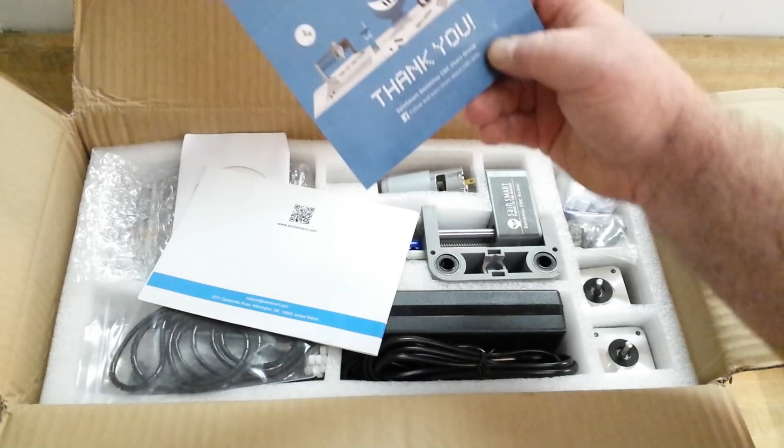Let's get it open and see what's up. This is the Genmitsu 3018 Pro CNC router, engraver, milling machine. You can even get a laser for it. Now, we're not going to be making any parts out of hardened steel or titanium or Inconel, but we can do some nice work on plastic, wood, acrylic, aluminum, and brass. So I am going to unpack this, get it all laid out here nice and neat like, and then we'll come back. Alright? Alright.

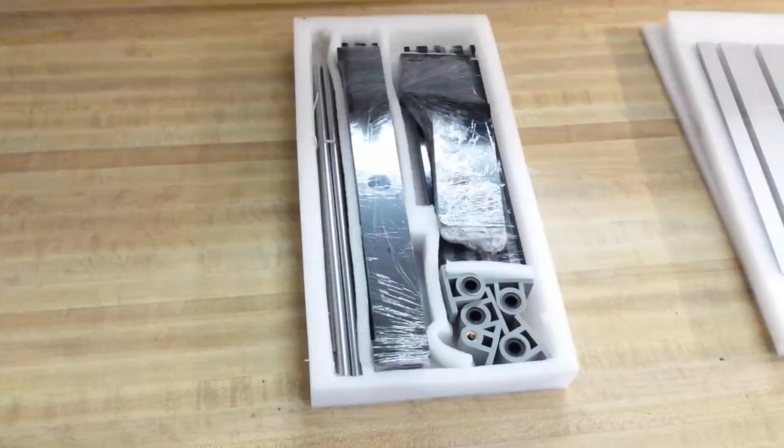Okay, so there are 3 layers in that big box. This is the bottom layer, and inside we have our linear bearing rods and Acme threaded lead screws. How about that? That's a huge improvement over the 3D printer that I built a couple years ago. This has actual Acme threads.

We've got some plastic pieces here. These are frame pieces, obviously. More plastic frame pieces. This aluminum X extrusion type stuff. And we have linear bearings, which I thought on initial examination were 3D printed, but I see ejector marks, so they've been injection molded. So far, I'm pretty impressed.

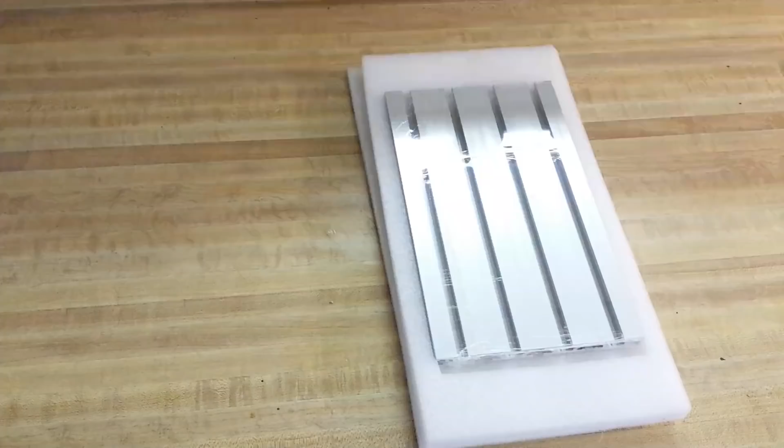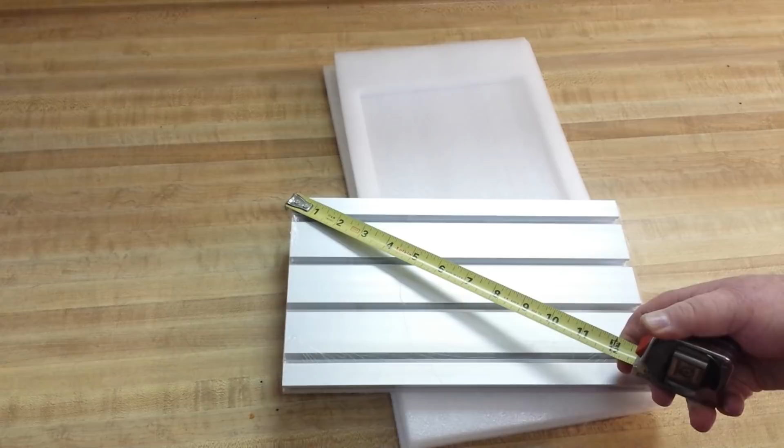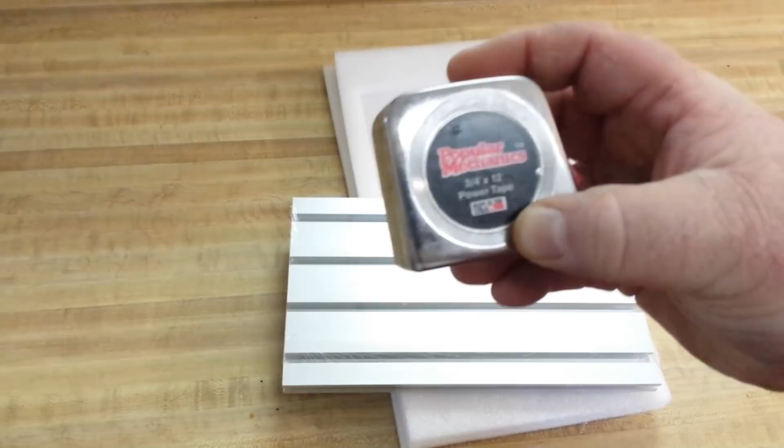The middle layer in the packaging consists of this extruded aluminum workbed. That's actually kind of heavy. We're looking at 1 foot by about 7 1/4. Yes, this is the Popular Mechanics, American made. No metric on there. I'm just teasing you guys. I use metric all the time, but sometimes it's fun to tease you a little.

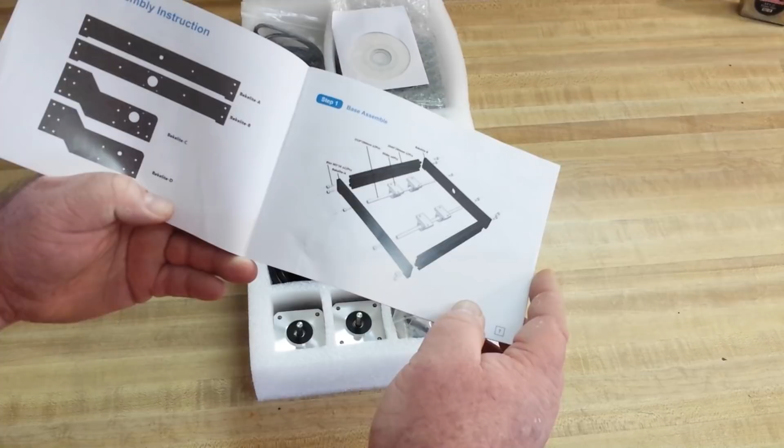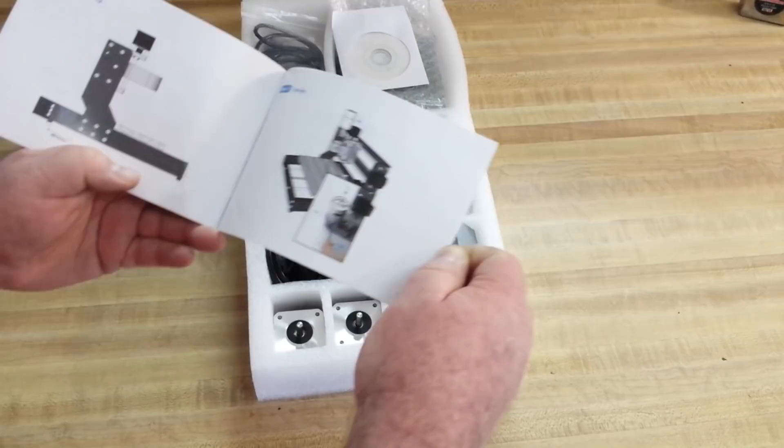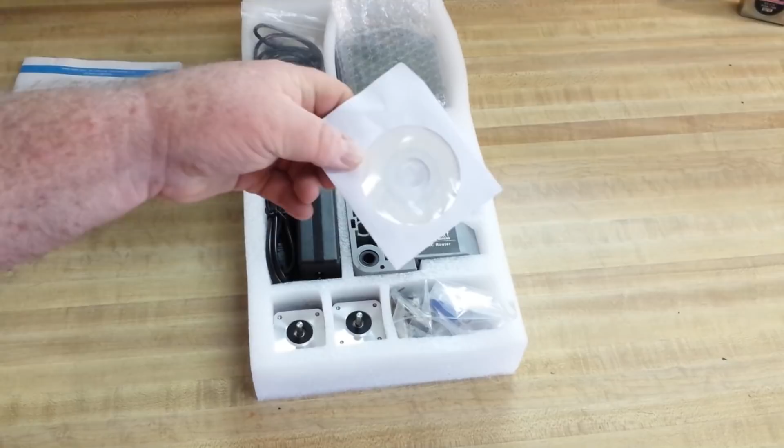Alright, here's our final pack of stuff. This is what was on top. We have the manual. Oh my, they're saying that plastic is Bakelite. I really hope not. Bakelite is like one of the original plastics from the 1900s. Anyway, nice manual. We've got a little, I assume it's a DVD or CD, you know, one of the two.

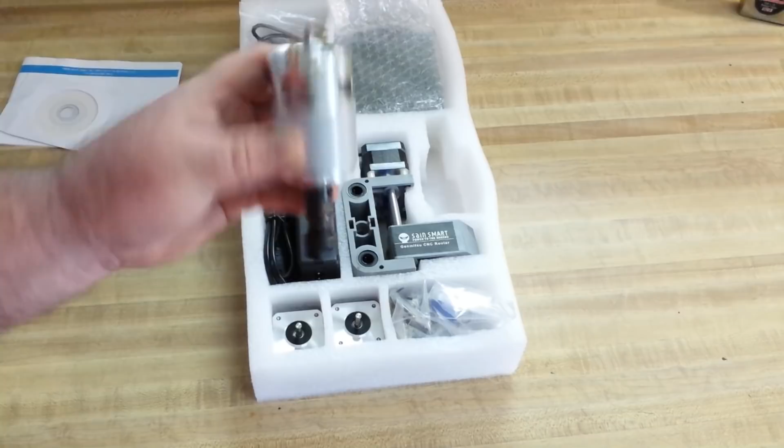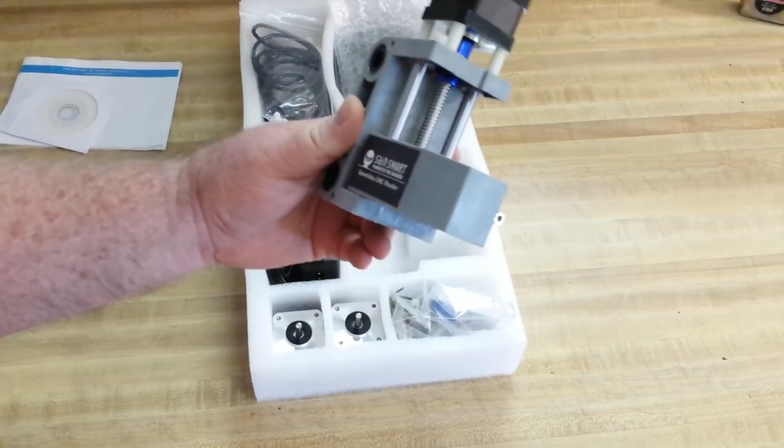We have our spindle motor, unmarked, fitted with an ER11 collet. That is considerably smaller than the collets that go on my mill downstairs. We have this mounting unit here, which the spindle fits into, and it's already mounted with a stepper motor. We have a couple of NEMA 17 sized stepper motors, a bag full of hardware, wire wrap and a couple wrenches, another bag full of hardware.

I call these Sony or Panasonic style power cords. You find them in a lot of stuff. That goes to the power supply, obviously, which is right here. AC-DC adapter, I know it's kind of hard to read that black on black. ZF102A-24750, input 100 to 240 volts, output 24 volts, 4.75 amp. Okay, then one of these. Also, some bits. From what I have seen online, I don't think these will be very impressive. We'll look at them later. I'm assuming that's the PC board. Chip brush. USB cable. And some wires.

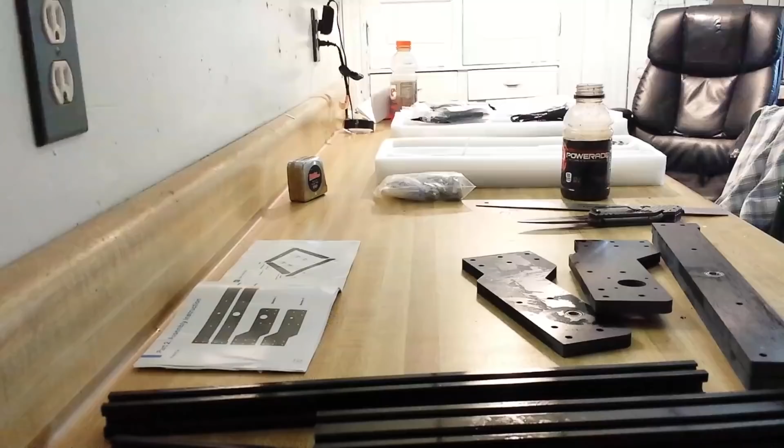All right, I'm about to start building here. I want you to take notice of a couple things, like how well you can be able to see in there. Let me see if we can't switch the old light on. Nope. Okay, there we go. Look at that. That is just garbage from not cleaning up these parts beforehand. It's just aluminum.

And all of these parts, both the aluminum and the plastic, are oily. So everything is going to have to be wiped down.

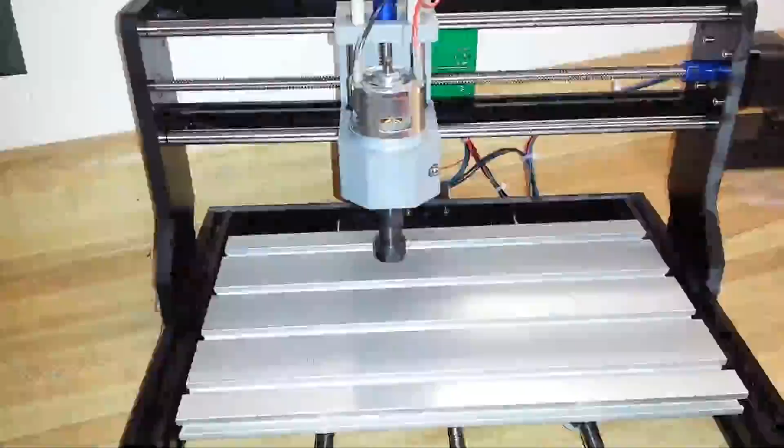She is all nice and put together. No real caveats in putting it together. She went together real nice.

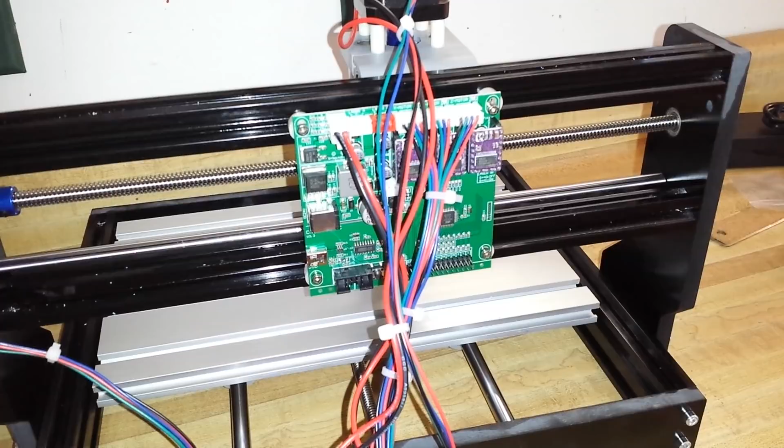Let's take a look at this board here. Let me get some light on it. There's our brainy box, you can't even see it, can you? Right there, that's the Arduino. Then we've got motor drivers, our power in, and our USB mini.

Concerns - will it work? Never know. Also there's no plus or minus, positive or negative, on the spindle, so I don't know if we'll be doing conventional milling or climb milling when it turns on. I guess it doesn't really matter in this case.

So then we have our bits. I don't know why they wouldn't just send end mills. I've got some ordered, they'll be here Tuesday - this is Sunday. So what they give us are these little half-of-a pointy bits. I don't know how well they'll do, but for now it's all we've got. So we will definitely use that.

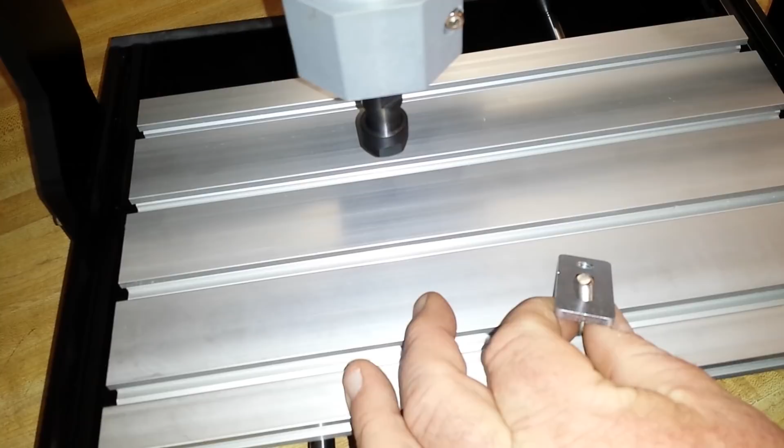Here's what they give us for hold down - some big ass screws with some washers. Is that actually supposed to... that's strange, I don't know why that's threaded. I mean, I wouldn't want it to be threaded. I want this to be loose.

So I got us some test wood. I guess we can try and mount this in here. I'm not going to do it right now, but you get the idea, you know what I'm talking about.

Alright, next up we got to get some software rolling, right? Right, let's do that. Okay.

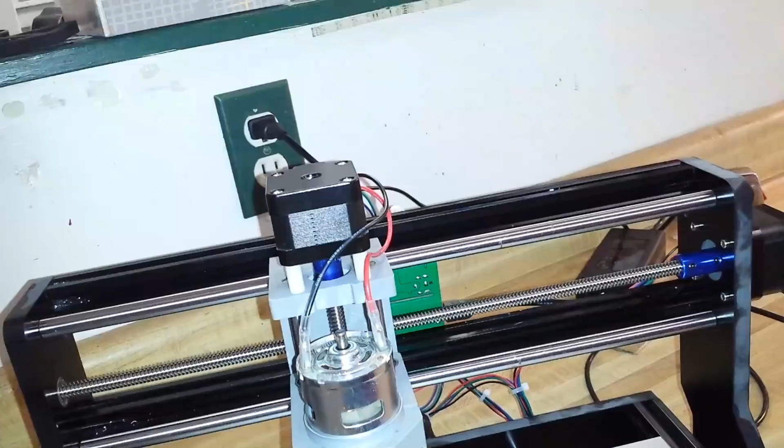Power supply is plugged into the wall. Let's plug in the board. We got some red lights, got a couple sounds, nothing has exploded. So far so good, let's hook up to the computer.

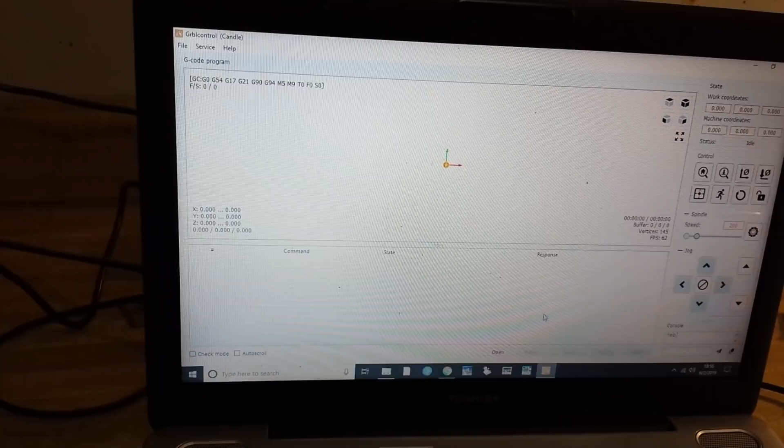Okay, this is the software that came with it, it's called Candle. So if I move the jog button... it's moving. But the X and the Y are reversed.

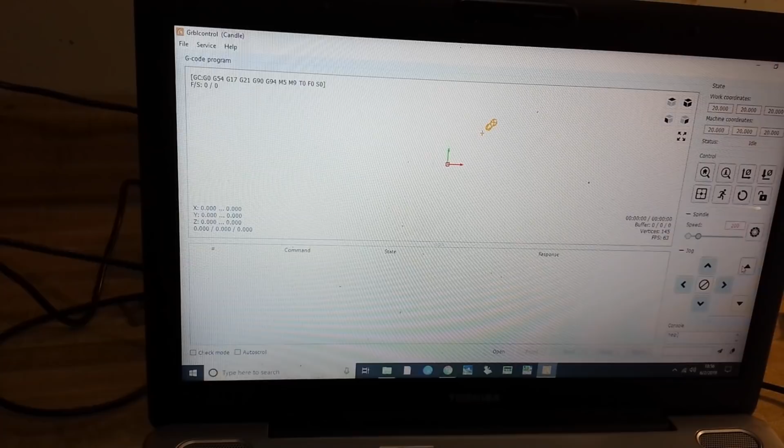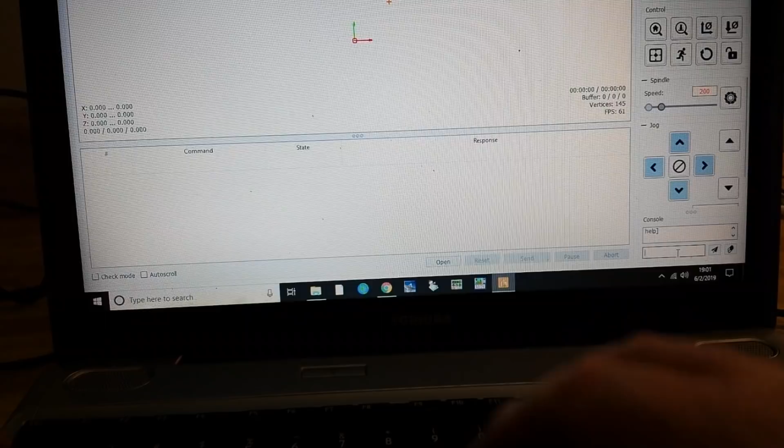Now there's a way to fix that. Okay, so we want the step port invert mask binary, and I love where it says here, you really don't need to completely understand how it works, just enter the settings. So, do we want to invert X and Y axis? We send $2 equals 5. So we'll get out of there - I guess this is where we send it, $2 equals 5. Now let's see if they move in the right way.

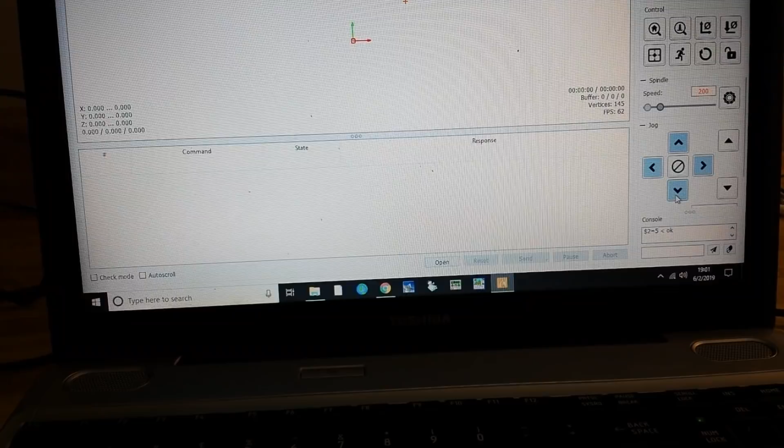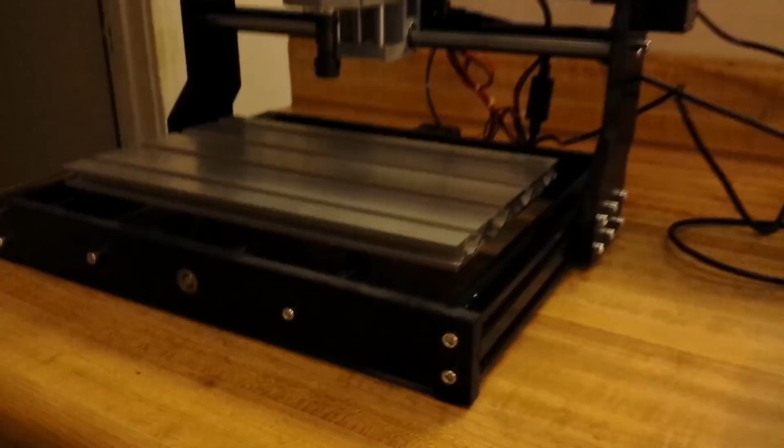My Y-axis is still inverted. $3 equals 7 is the proper code. Now we can jog it. Pardon the bounciness. Alright, here we go - Z-axis up, Z down, X right, X left, Y forward, Y back. Hot damn.

I think we're ready for the next step. Just so you know, I expect this to go horribly, terribly, hilariously wrong.

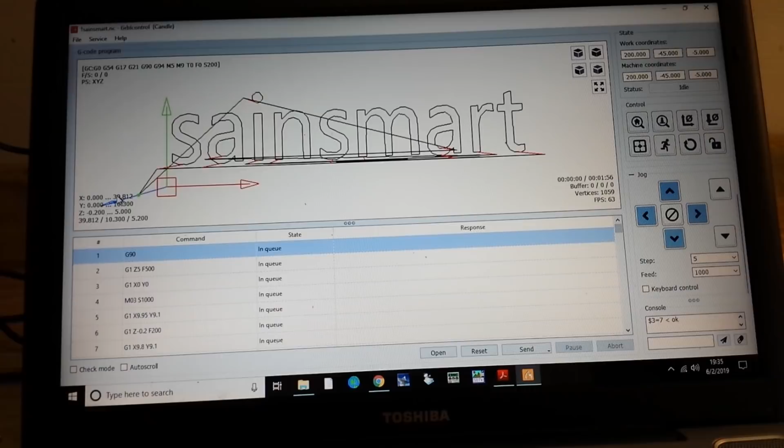So here we are, back at Grblcontrol. Hold on, pardon me - alright, back at Grblcontrol. Now this says X from 0 to 39.8, I'm assuming those are millimeters, and that should be about 4 inches. About there, with a Y of 10.3, a little over an inch. I hope this works.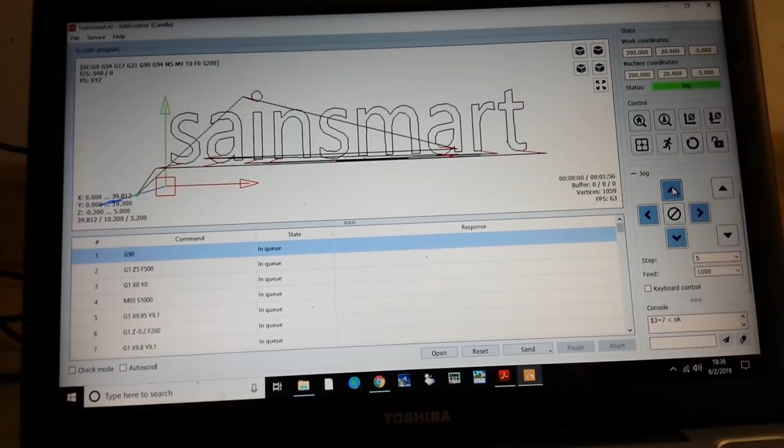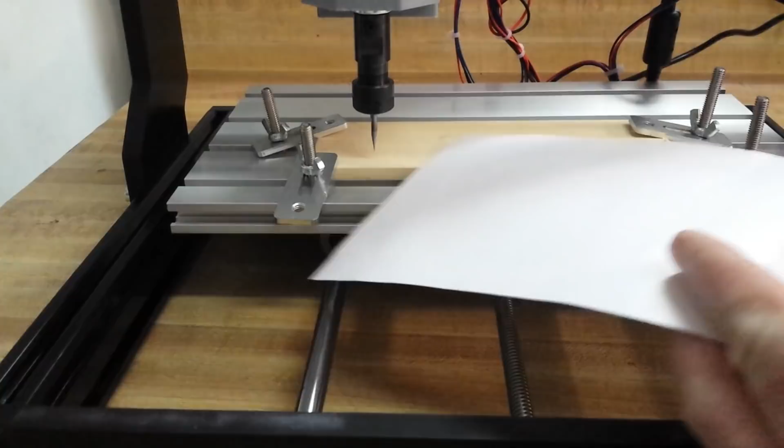So I guess the first thing we have to do is set our 0 point. Let me move you over to the other side again. Okay, so I think we're pretty good there. I'm going to set our X and Y 0. Now I need to set Z, so it said to slip a piece of paper in there. I'm going to change my step size here to 1.

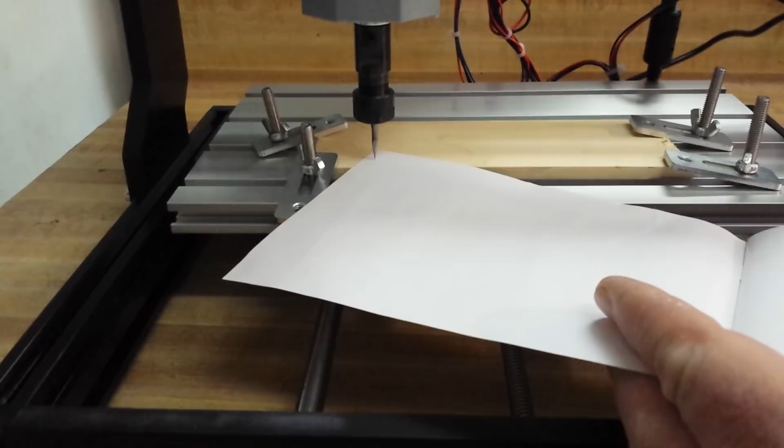Needs to be lower. Okay, hold on, I'm going to have to drop the bit down a bit. I'm used to the big mill where you chuck it up in there as far as you can. I should probably have unplugged that - the whole time I was doing it I kept thinking I'm going to lose a finger. Alright, piece of paper... yeah, that's 0.

0 is set, get my paper out. Okay, nothing left to do but hit send. Cross your fingers. 3, 2, 1.

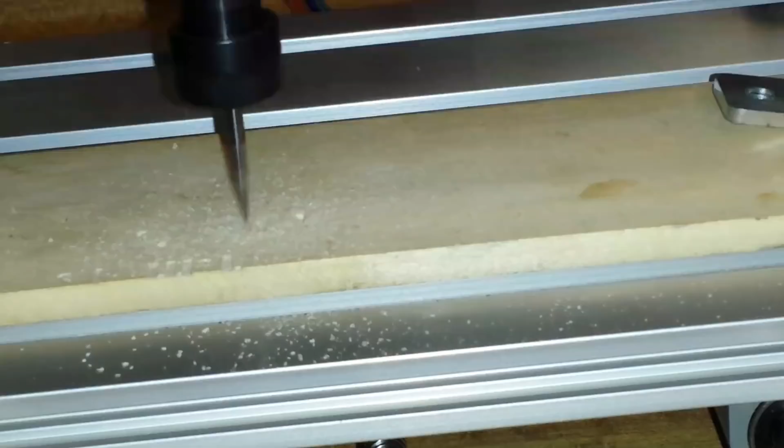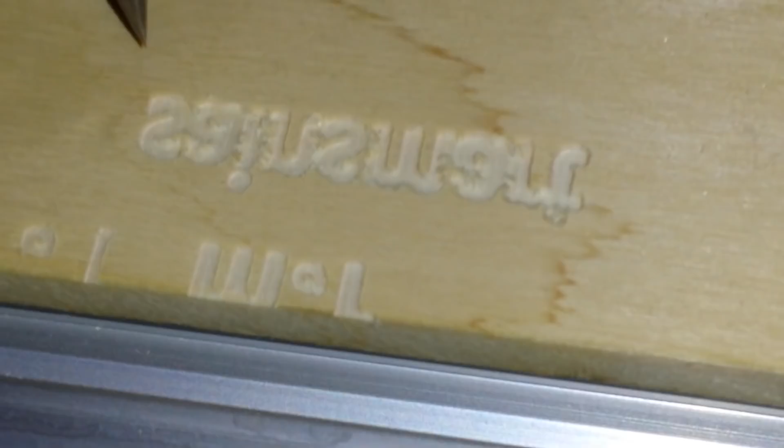Well, I don't know what happened there. It kind of says SainSmart. The carving went well, but I don't know what the hell happened. Let's try something else. Okay, here's another one about the same size. It says iPhone, let's give it a shot.

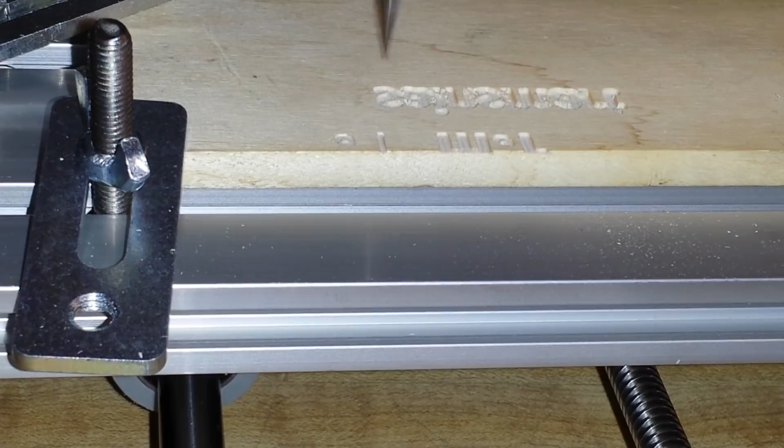Same thing - do you think my X and my Y are backwards? Let's reverse them and see what happens. I think we got it. Yep, it looks like we got it. I just had to reverse the Y-axis, the X-axis was fine. Two letters to go.

Well, there she is. I started on this project at 1:30 today, it is now 7:55 PM. The actual construction took about an hour - most of the time was spent in this configuration madness. But there it is, and I think it looks pretty doggone good.